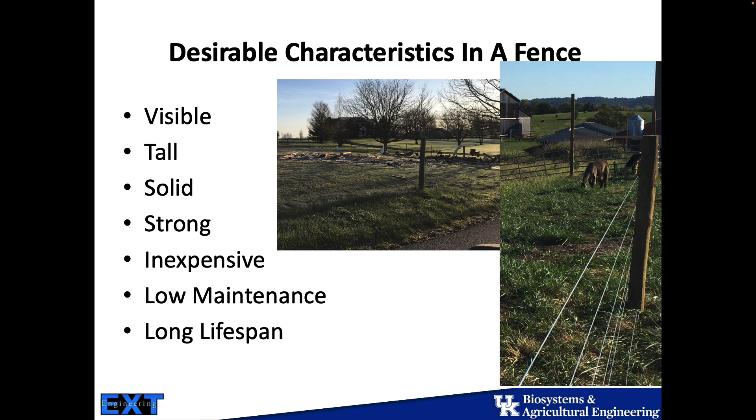But there are a lot of different types of fences on the market. I do this talk a lot in central Kentucky where there's even higher pressure towards the wood plank fencing. As we move a little bit outside of central Kentucky, that's less desirable, but a lot of people still like a wood plank fence. They like the aesthetic of it. And depending on what they're doing and how they're managing their farm, it's part of the image of being a Kentucky farm, is wood plank. So we're going to talk about that one first.

Then we're going to talk about woven wire, fixed knot high tensile, what I call a smooth high tensile wire, and then a barbed wire fence. Barbed wire is typically high tensile at this point too. And as we go through all of them, I'm going to give you sort of my thoughts on the type of fence and then a cost comparison.

I've used what's known as the Virginia Tech calculator there, and I have a link to it. It's in there. It's a very long link. It's basically an Excel spreadsheet that you can modify. It's extremely flexible. It allows you to put in different costs for different materials, assign different types of materials. I've done an assumption here that I have 1,000 foot of fence for each of these styles. I'm bracing both ends. All of my brace posts are going to be 8 foot long and 6 to 7 inch diameter posts. My line posts will be 7 or 7.5, 4 to 5 inch diameter posts.

In a lot of cases, I've followed NRCS specs when I've done these designs, but I have gone and bumped up the size of the post for both the line and the corner post one size from what NRCS requires, because as I said before, I have a lifespan on this fence that I'm building, and I want it to last long enough that my children will be building the next one, not me.

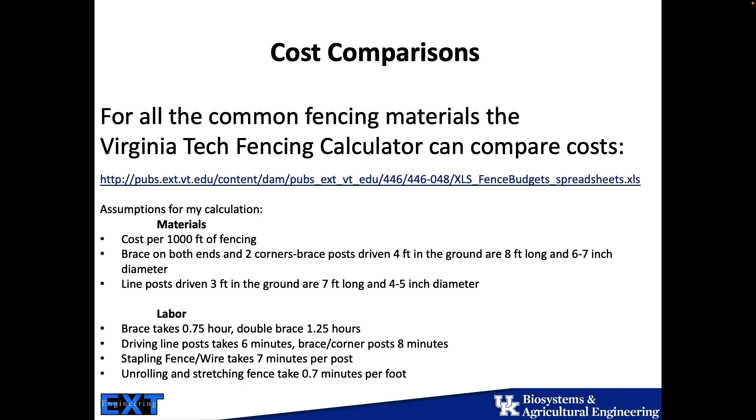For the wood plank fence, this is the only fence that doesn't need a brace. There's no tension on this fence. It's just wood coming in. These are all done with actually the smaller line posts. We're not even doing the bigger posts here. When we see the cost here in a second, you'll see that it's still pretty expensive.

But the one thing about this is that all of this cost is done for a fence that's untreated. So there's no painting being done, there's no maintenance being done. This is a high maintenance option. So not only is there a high upfront cost to putting in a plank fence, but there's a lot of maintenance costs associated with it, and that's not included in here.

The beauty of a wood plank fence is that it's a very good visible barrier. A lot of times, even when we do working facilities for cattle and things like that, we'll use boards in combination with wire, and that's because it's a really good visible barrier, and it's something that is solid and strong. So it does work well in that regard.

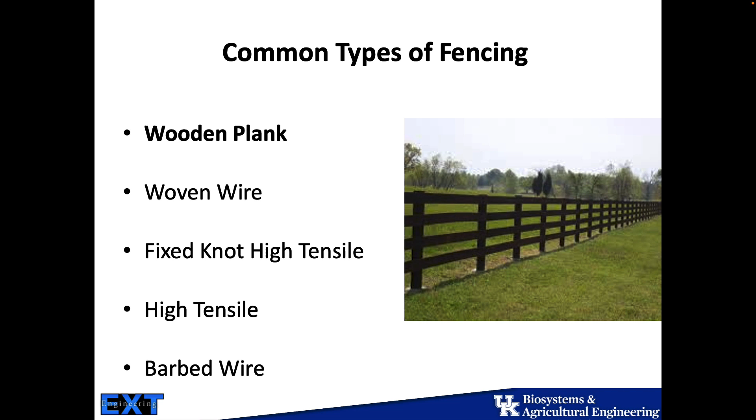I went ahead and put in a 4-board plank fence cost, and I have it a little over $6.50 a foot, $6.65. We'll go $6.65, that's a better number. And I went with a 4-board plank fence here, treated wood posts, and I think I have rough cut poplar as the planks on here.

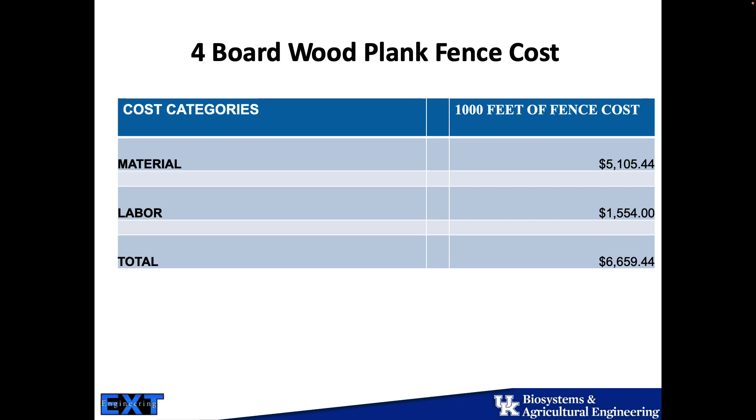I went 4-board because I tell people all the time that a plank fence always has a board down. There's always one missing, and 3 boards will hold in an animal, but 2 doesn't. So I go 4 so that I know that while I'm maintaining it and there's only 3 boards up, I'm still okay.

If you're trying to get someone to build any of these materials, these prices are not what they're going to charge you. This is just a good idea for you to figure out what your cost and time and energy is really going to be worth, and if you want to do it, and also to compare what they're charging versus what you think it would cost you to do it yourself.

Did that fence include painting? No painting in that cost. No maintenance at all in that. And part of that is because you'd have it up for 6 months before you'd paint it anyway. You'd want it to breathe before you actually paint it. So I didn't put it in the initial cost. But every few years that cost pops back up again with that type of fence. So not to be neglected.

Woven wire, this is the traditional fencing that we see a lot of people anticipate building on a perimeter with a neighbor. Woven wire is a good physical barrier for those animals. And if you ever do get into disputes with neighbors, this is probably what's called for a lot of times for the type of fencing that you're going to be required to put in with a neighbor.

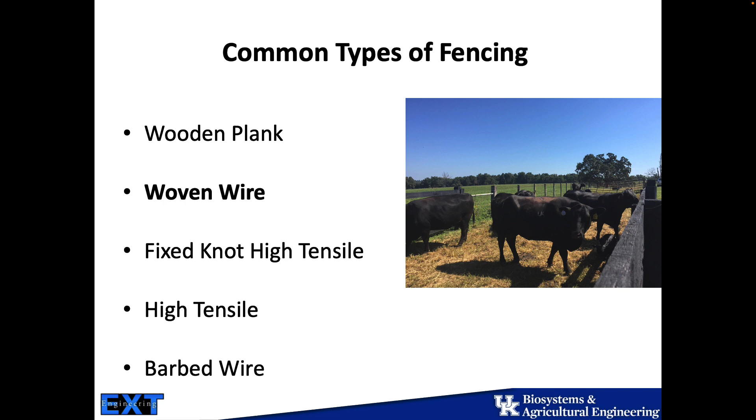Woven wire fence, by the nature, we're going to talk a little bit about high tensile wire and standard steel wires. The major difference between the two is that high tensile fence is built with a higher carbon steel. That higher carbon steel has memory to it. It means it bounces back. It doesn't stretch and then stay stretched like a traditional woven wire. And the high tensile wire also has less stretch in it. It has 1% as compared to about 10% in a standard woven wire.

If I'm building a woven wire fence, I'm going to build that woven wire fence assuming that over time it's going to stretch, but I'm going to use larger wire in it because of the different characteristics of the metal used in this as compared to the 12.5 gauge wire that we can use in the high tensile wire. This is going to probably use number 9, at least on my top and bottom runs, and then a bigger wire typically in the center even than that 12.5 gauge.

The cost on materials here is about $2.80 a foot, and labor here, I have it $1.50 a foot to drive those posts. I have my post spacing here every 12.5 feet. I need to have it if I'm doing NRCS specs currently at 14 feet. And the reason for that is because the way that this woven wire is built, the vertical members in the woven wire aren't continuous in the same way.

When we talk about the fixed knot high tensile, it has a continuous vertical stay. Every piece of metal that goes vertical is continuous, and so it has a vertical structure in that fence. This fence does not have that type of structure because of the hinge joint on it. Each time we wrap, we have essentially a break. So we have different pieces of metal every time we go up vertically, and it doesn't hold itself up in the same way that the fixed knot high tensile does.

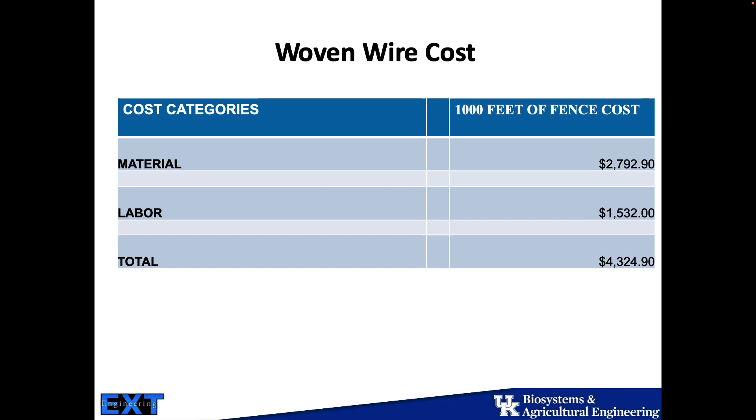So we have to have those posts about every 12.5, 14 feet to keep that fence standing upright and not sagging down. And we end up with about $4.30 a foot. Not what someone else would charge, but that's what I would charge myself if I was building it.

Fixed knot high tensile looks almost exactly the same as a standard woven wire. And when we get out this afternoon, you'll get a really good chance to look at a fixed knot high tensile wire. This is a really interesting style. One of a couple things, it has that higher carbon steel in it, that memory. It doesn't tend to sag in quite the same way. It also has those vertical stays, which allows us to stretch out our post spacing.

So one of the major benefits of this fixed knot high tensile is that we can move our post spacing out to 20 feet pretty comfortably, even up to 25 feet if we wanted to. And it depends a little bit on how the land lays where you need those posts to go, but we get away with significantly less posts in our design. And so our material costs come down a little bit under $2 as opposed to that $2.80 that we were looking at on the last fence. And the primary driver of that difference is not having as many posts in this line.

The other thing worth noting here is that traditionally this type of fabric or wire that we would use on the fence would have been more expensive, but with the cost of steel going like it did, the actual weight of a roll, 330 feet of this, is actually lighter than a roll of the 9 gauge with the 11 gauge middle wires on a standard woven wire, and the costs have now come out so that this type of fencing is very cost comparable, sometimes even a little bit cheaper depending on where you're going to purchase it. And so we come out at a little under $3 a foot. Not bad.

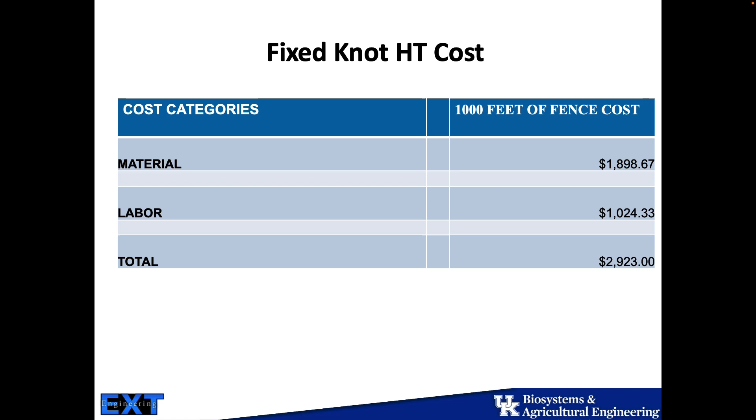A standard high tensile fence is electrified. For the sake of argument here, we're not going to talk about a smooth wire, high tensile wire fence and not talk about electrifying it. This is, in theory, a psychological barrier. Jeremy's going to go into much more detail about it, but I don't see a reason to build a smooth wire fence and not electrify it, other than a barbed wire fence. We would not electrify that one.

Don't worry, Chris, I won't forget it today.

The 5-stranded high tensile electrified fence, I have about $1,400 or $1.40 a foot for materials. This also allows us to go out on our spacing on our posts. I did 25-foot wood posts on this type of fencing here. You could, in theory, actually stretch these wood posts out to 50 foot, but if I was doing this as a perimeter fence, I would want something in between every 50 feet. I wouldn't want to go quite that far without some sort of spacer on some regular spacing just for comfort. So I went ahead and just put it on 25s.

I didn't put any posts in here other than wood posts in any of these designs. So no steel posts, no fiberglass posts. I just went with straight wood, and I think 25 is a reasonable number here. The really nice thing about both this fence and the last one is I said those posts are on 25, but this fence is structurally controlled by our braces on the end, and if we had like a rock outcropping, we can move where those posts are very easily so that we can space them opposite of those areas that we don't really want to drive.

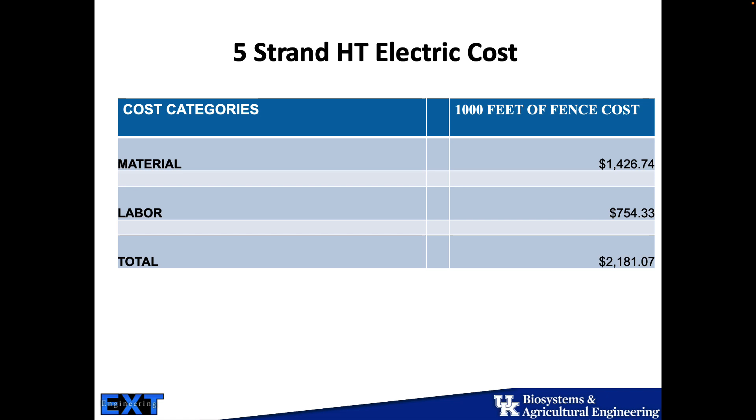And last but not least is a barbed wire fence. Most barbed wire at this point has also gone to high tensile, meaning that a lot of that structure is associated with the tension that we put on those braces on the end. The barbed wire, though, cannot be electrified, which means we have to go back to spacing our posts much more regularly.

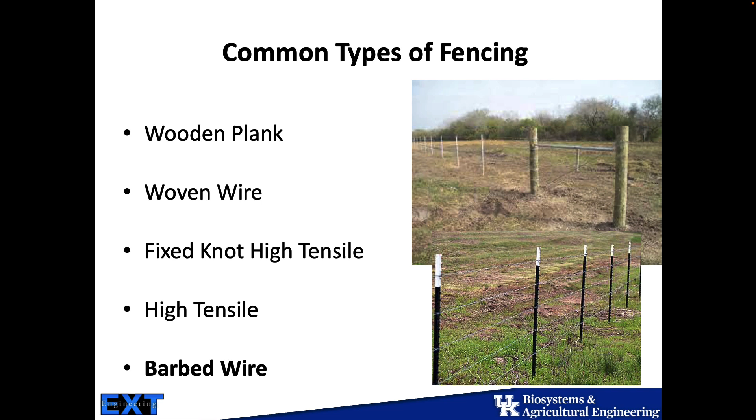And I know we're going to talk about the law later on creeping through the fence, and people will joke that animals don't creep through a fence, but if you literally have smooth wires that are only horizontal, animals can creep through the fence. It is possible. Even with barbed wire, they can figure out how to do it. And so we do need to keep our post spacing a little bit more regular with this barbed wire fence. And as a result, our material costs jump back up because we have to have more posts in the ground. And we end up at around $2.50, $2.60 a foot.

So this actually is coming in at $2.60 a foot. The fixed knot high tensile is at $2.90 a foot. And our smooth wire electrified fence is at $2 a foot. So this barbed wire, which traditionally people think of as the least expensive option, is not actually the least expensive option. It's sort of a middle ground. And a lot of times this barbed wire and the fixed knot high tensile, depending on how we manage post spacing and some other things, can even be cost comparable. So it's worth doing your own investigation, because depending on when I do it, those costs end up looking very similar a lot of times.

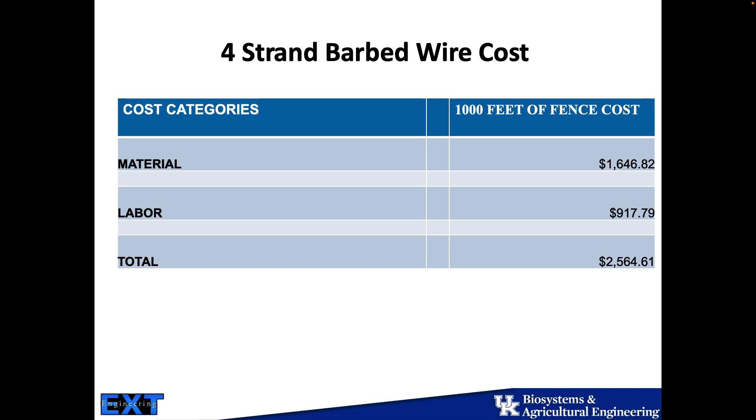What's the spacing on the post here? 12 and a half. I put them on 12 and a half again. NRCS says they have to be at least on 14s, but 12 and a half works much better into 25, into 1,000 foot. So I just go ahead and do everything on 12 and a half, because that's probably what I would do if I built it. Actually, what I'd do is measure it and then divide it out so that it came out under 14, but it'd probably be close to 12 in most cases.

Post types, I did everything in here with treated wood posts, and there's no reason, other than possibly having an organic operation where I needed something that was not treated to go in the ground, that I would choose a wood post that wasn't treated. There's nothing about purchasing an untreated wood post that makes a lot of sense economically. Steel T-posts are a pretty cost-effective thing to do, although they have definitely gone up in price as well in the last couple years. But if it was me building a fence, I'd probably build it with wood, and then if I had to replace line posts, I would use steels to do that. That's just sort of my preference.

And if I was going in with any sort of electrified fence, then I would much prefer wood over steel. And these fiberglass ones, and what you'll see later today in the field from Jeremy, there's some pretty interesting things on the market that are not just a standard fiberglass post, that are also out there right now for putting in electrified fencing, which is kind of cool to see.

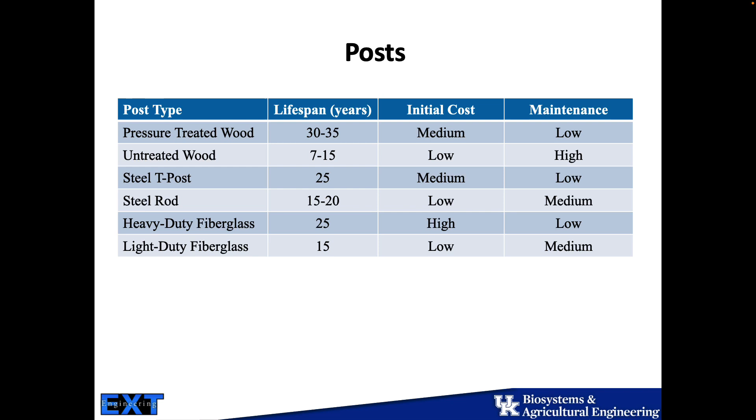Fence planning. If I am talking about fences and costs, nothing that I've said here today was a cheap fence. There's nothing out there that's so cheap that you want to do it 8 times over. It's expensive to build a fence. And so doing good planning before you start is really important, because the last thing you want to do is build a fence and then feel like you have to tear it out 5 years later because it's not where you want it. So be really intentional and really think about what size pastures and paddocks you're trying to make.

And then I put this note in here about, do you need a variety of sizes? Because a lot of people don't instinctively want to make their fields different sizes. They want everything to be the same size. And there's 2 reasons you might not want to. One, you might have different quality of soils. You might have bottom ground that's much more productive, that you really don't need as many acres for them to graze the same number of days that you do on a hillside.

And also, a lot of times people will have different size groups of animals that they're trying to manage. So they'll say, oh, I have this group of cows, but you also have 3 bulls that you pull out and you have them in there 8 months of the year. And those bulls need to have somewhere to go. And it doesn't have to be the same size pasture that you put your 50 cows in. It might be a different size pasture.

So really account for that, or if you have a weaning lot, that weaning lot doesn't necessarily have to be a full-size pasture, but it has to be built correctly and in the right spot. So all of those things need to be accounted for in the planning, and it's much better to do it before we start building permanent fence.

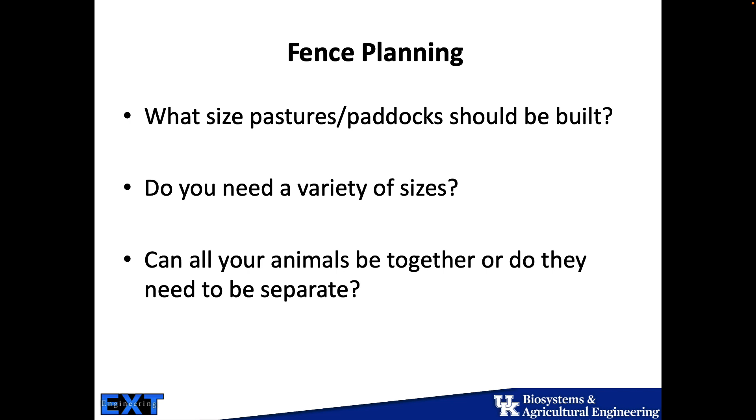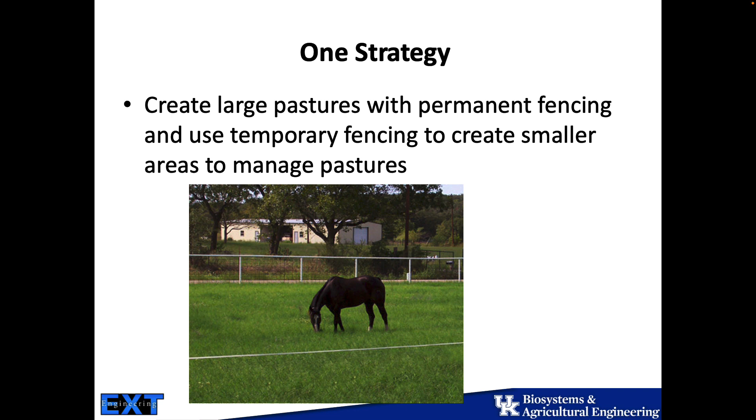One thing I do encourage people is, your perimeter fences are non-negotiable, because the animals leaving the farm is not a good thing. At the very least, create large pastures and good perimeter fences, and then use temporary fencing to create smaller areas to manage. That's nice for rotational systems. It's also nice to test an interior fence on a temporary or a semi-permanent basis before you put in a full-on permanent fence, to make sure that you're really comfortable with where you're planning to lay out that fence line.

And there are a lot of options for doing temporary fencing as part of this. A lot of times people will say, oh, I can't do it because I have small ruminants and those pigtails don't keep in my sheep or my goats or my alpaca. But there are a lot of different types on the market and different qualities of posts out there where you can adjust the heights at which you would put in your temporary wire.

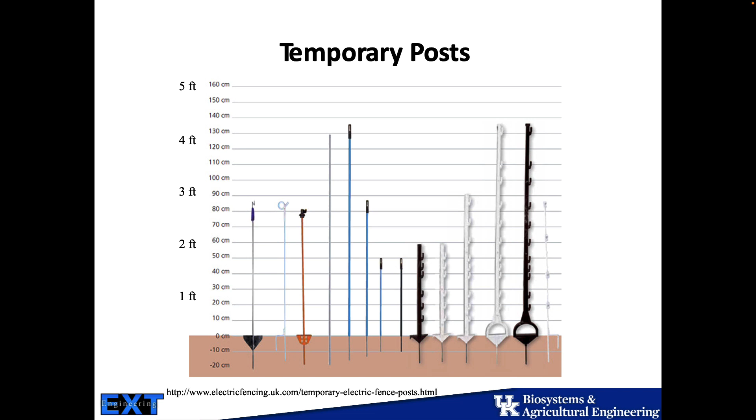And there's also a lot of different types of wires out there, from the tapes and the ribbons that are much more visible for animals that haven't been trained yet, down to the poly wires. Different options for visibility, different lifespans on those materials, but those materials are not meant to be permanent. They're not meant to last 20 years, so you shouldn't expect that kind of life from them. On the other hand, they're much more portable and much easier to maintain underneath. But they do have some conductivity issues. They're not nearly as conductive as the wire that we're going to see today, that 12.5 gauge high tensile steel wire.

Could you mention the colors of what is most recognizable? Around here, we would absolutely recommend white over yellow. We have these seasonal droughts pretty regularly here in the late fall, and those yellow wires disappear. They're very hard to see. They're hard to UV stabilize. They don't tend to hold up structurally as well. Certainly the white ones tend to do better.

And there are different qualities. Some people will call it turbo wire, or it'll be like a 9-strand versus a 6-strand poly wire. And all of those things will play into the quality of that wire and what you're going to get out of those materials.

Energizer-wise, there's lots of different things on the market. There's solar ones, there's plug-ins that would go into an AC, and some people just even have battery-operated energizers or chargers. Jeremy's going to go in much more detail about it, but from a cost perspective, if you can plug in an AC unit, it's what you're going to want to do. It's definitely your best option from a cost perspective.

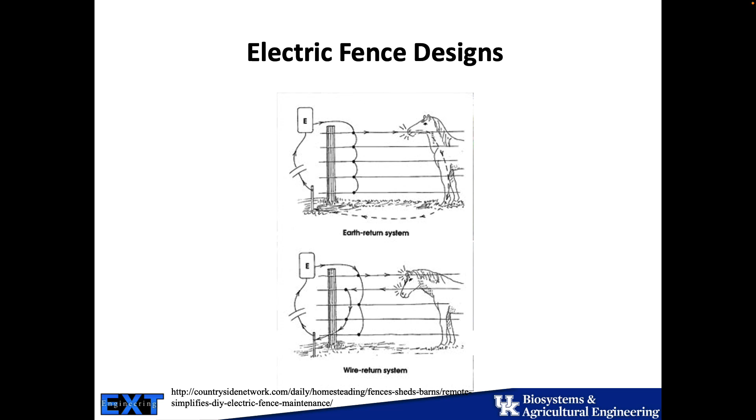And I think Jeremy's going to cover this as well, but I only touch on this because I have these alpacas, and you can see on mine that I actually have what's referred to here as a wire return, where I have a hot and a grounded wire. Really good for small ruminants. For most people, though, an earth return or an all-hot wire system is much better.

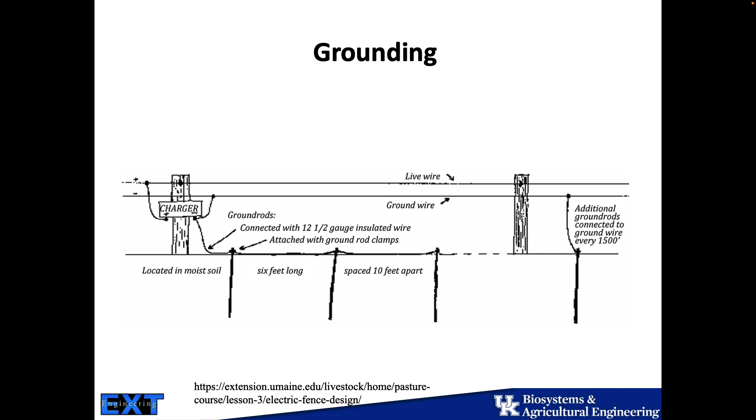And getting that grounding right is really critical, and you mentioned already that grounding pub. I think that's really useful that we have that in there. This is where almost all electric fencing fails, is people say, oh, it doesn't work. Well, it doesn't work because it's not shocking the animals, and so getting the grounding right is key to getting these animals to respect an electrified fence.

Just one sort of last thought here, because this is about costs and types of fencing. If I was building any fence right now, and I have built quite a bit in the last couple years, I have a lot of fixed knot high tensile that I've put up on my perimeters with neighbors. And I have intentionally, instead of putting a barbed wire on the top, which is what most contractors want to do, I have electric wire on the top and on the inside of my fence.

And I have it for 2 reasons. One, because I just spent a lot of money to put in fence, some with contractors and some myself, my own time and effort. And it's a major investment, and I would like it to last. And I don't want my bulls and my cows to rub on it in the spring when they're trying to get that hair off. And hot wire does keep them from doing that. Honestly, it does a better job than barbed wire does.

And 2, it also gives me a supply of electricity anywhere in the field, so I don't have to set up a solar and a temporary grounding system to run a temporary fencing system somewhere in my fields. And that has been really nice to not have to constantly go out and figure out where to ground and figure out where to set up a box and move it all the time. Having that power everywhere is really useful. So with that, I would take any questions.

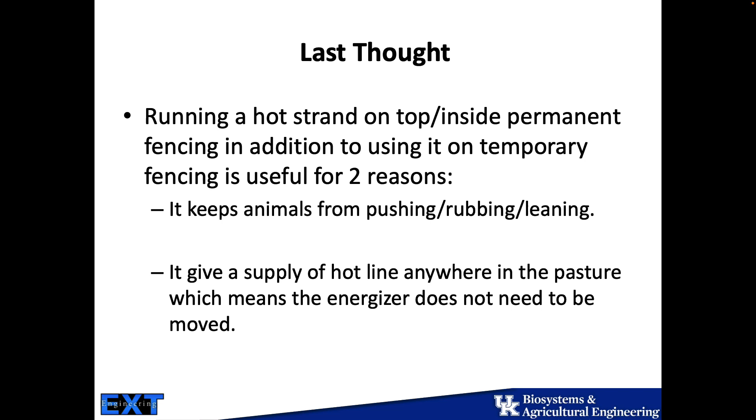Any questions for Morgan? I'm the tech for the area for NRCS, and I know you quoted, referenced our NRCS standard quite a bit, so I just want to make you aware that our standard has recently changed. Yes. Just in the last month or so. It's pretty easy to find online. You just Google a field office tech guide and find that new standard.

Yeah, it's absolutely excellent. And the ones I'm referencing are the newer ones. The older ones would have allowed for any smooth wire to be at 14-foot spacing, and now with the electrification, we can space out to 50 feet, which is tremendously helpful from a cost standpoint for people that are on contract if they're negotiating their contracts, but absolutely, you should go and review them because the new ones look really nice. Yeah, they just came out, I think November 1, didn't they? I think it was. We're gonna put all these available online electronically, and we'll put the new standards in the electronic. Yeah, but thank you, because it's a pretty significant change. We're really happy about them, so. Yeah.

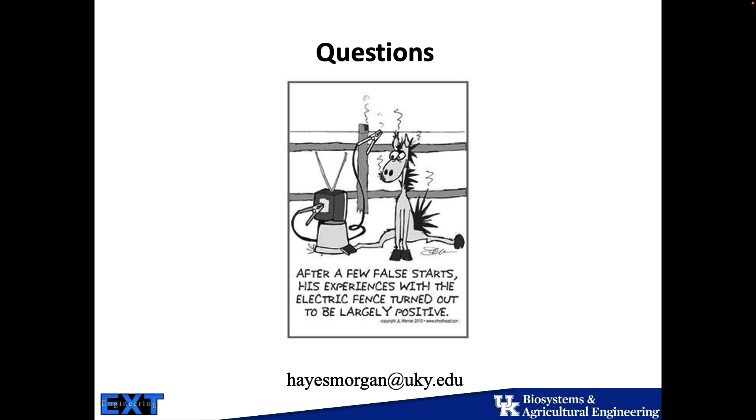But what I'm not hoping to do is have them get caught in an electric fence and get stuck, continuously getting shocked, because I don't want to be the one to pull them out. And realistically, we're trying to train the animal. We're not trying to punish them indefinitely. And with the barbs, we get things stuck. In most cases, it's not going to kill anything. The way that power is built, it's unlikely to really, but it is dangerous. It's just not the ideal standard, yeah. And it also creates some weird charges on those barbs. Go ahead.